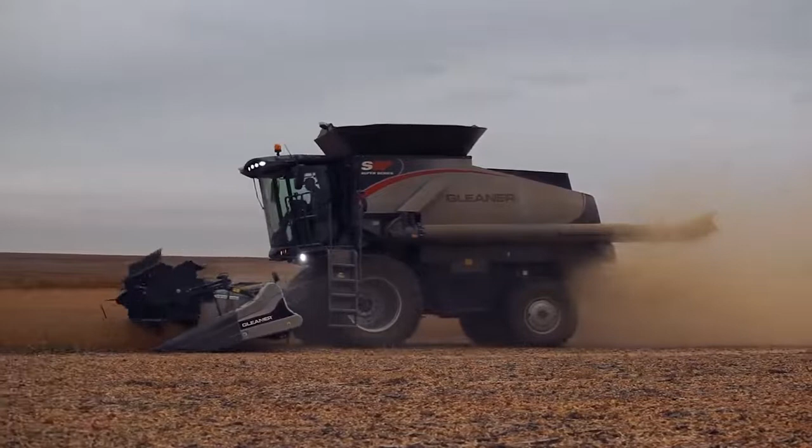Gleaner has a strong history of expertise in harvesting. Our lightweight, transverse design was born out of years of experience, and through that experience and specialization, we've developed a combine with our S9 series that can and will compete against any other competitive offering in the market and demonstrate exceptional efficiency, clean grain quality, and lower compaction.

This virtual event is a great way not only for you to learn about how Gleaner can add value to your operation, but also how to really optimize your machine throughout the year and throughout harvest to ensure you can get the most out of your machine. The team has a lot more in store for you here today, so I encourage you to enjoy our Live from Hesston virtual event. And if you haven't already, please visit our website at www.gleanercombines.com to learn more about all the latest offerings from Gleaner or to find your nearest Gleaner dealer. When it comes to harvesting, it's gotta be Gleaner.

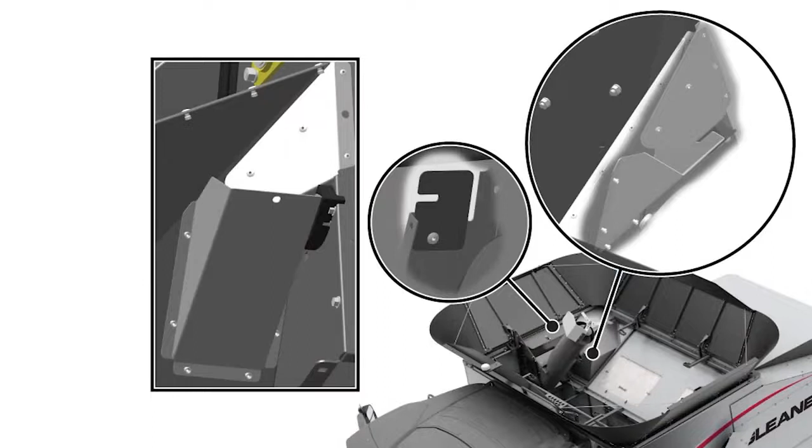The next item is the clean grain elevator. So we made improvements there as well. The chute and the funnel located on the clean grain elevator head cover have been updated to prevent grain leaks. The funnel has been lengthened and the chute has been fully enclosed. Additional sealing has been placed both at the funnel and at the clean grain elevator head door. This will impact those small grains such as canola, which can always find places to run out, even the smallest little cracks.

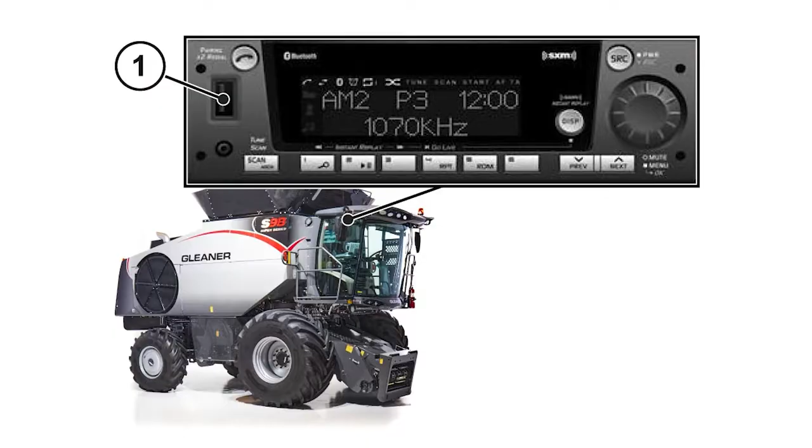Also, we've made some new improvements and added a new radio option. Both of these options have been updated to the latest display, which gives you the ability to charge iPads or whatever through the USB port and remove some of that old technology such as CD players. Both guidance receiver options have been updated also to the latest models. The Novatel receiver now is the Smart 7, and the Trimble guidance receiver is now the AG482. RTK is also available on your Gleaner combines as well right now.

So those are pretty much the model year 22 updates and improvements. There's more improvements being worked on currently with our engineering team right here in Hesston. So let's talk about kits. We have a few kits that will add performance to your Gleaner combine.

The slow speed elevator kit. This is to slow down the clean grain elevator when you're harvesting lower yielding crops. Speed obviously causes more wear on the chains and sprockets, along with less grain damage by being able to slow this down. Over the years, we've increased the performance of our elevators for these high yielding crops and we've sped things up, but it's not needed for all crops.

The next kit I would like to talk about is our chaffer extensions. These are additional hillside performance kits that you can put on to help keep that grain in its lane while you're harvesting on those slopes.

The Cascade Pan Blank kit is for those small grain applications. We added a perforated cascade pan for high yielding crops, which increased our shoe capacity. But for small grain, you may not need that, and this blank will actually help you clean up your bin sample in some conditions.

The perforated elevator boots have been around a long time. This helps remove dirt out of the grain while harvesting close to the ground - lentils, peas, beans, those types of crops.

And then we have a light seed kit. This is for when you're harvesting grass seeds, where low volume air is needed to keep that seed in the combine and not be blowing it out.

And then the last kit - don't forget that we have a hitch extension if you would like to pull your header trailers around behind your combine. Those are some of the kits available for your Gleaner combine. If you have questions on these kits, our product specialist can be a great resource for your needs.

So let's talk about some of the activities we've been doing lately.

We consistently hear from our customers about the low fuel usage, great grain quality, and low cost of ownership of their Gleaner combines. So our team decided we needed to start collecting some additional information from our customers to really understand the impact of all these items in a complete season. We asked several customers from different regions across the US to help us with this project, and we collected a lot of data. We also collected some from competitive machines as well, so we could compare.

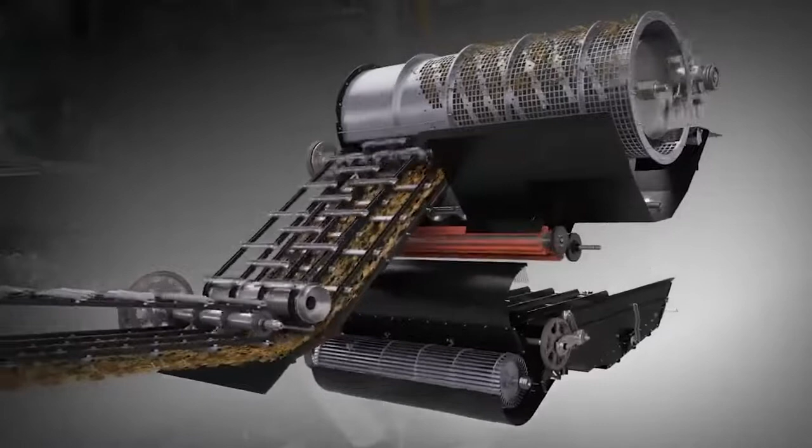Grain quality. The natural flow design keeps the crop flowing evenly without changing direction, controlling the flow of material from the time it enters the feeder house until it discharges out the back of the combine. 360 degrees of separation—the natural flow system is gentle on the crop, and the two-stage cleaning system will deliver a quality bin sample. But what does that mean?

No dockage at the elevator. And for some growers, it means being paid a premium for their crop without sacrificing capacity—all adding up, again, to increased margins for you, the grower.

And of course, fuel efficiency. All the items we've discussed thus far have a huge impact on the fuel efficiency of a Gleaner combine. Tied with AGCO Power engines, the machine will consistently harvest crops using less than a gallon per acre, all day, every day. And that equals less cost of operation.

As discussed, some things are out of our control, and some things we can control. There are just a few that we can control, and the Gleaner delivers a low cost of operation and low cost of ownership by design. No, this combine is not a 6,000-bushel-an-hour machine, but we know on the average farm it will harvest 3,500 to 4,000 bushels an hour for the entire season, not just for an hour, and do it with less cost than our competitors.

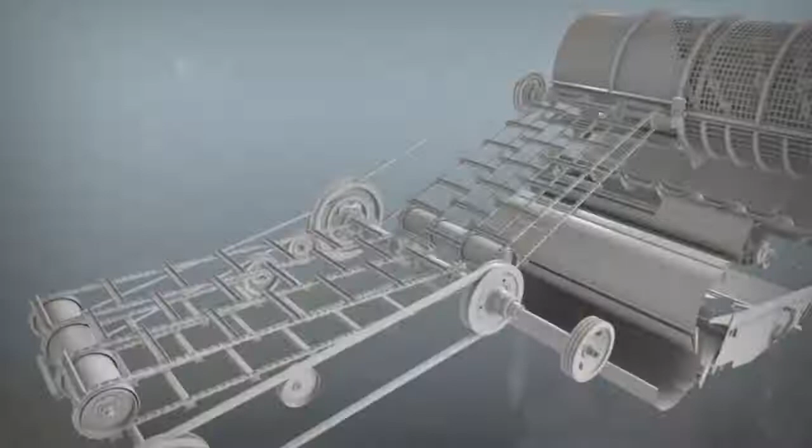The Gleaner combine uses two feeders, a front and rear feeder. The rear feed chain runs 10% faster than the front—this helps avoid any issues in the transition between the two feed chains. The feeder house was updated for S9 machines. First, the area below the feeder chain that introduces the crop into the processor was increased, which helps in heavy crop conditions and canola. In addition, the feeder house was lengthened to help with visibility of the header.

So let's talk, Aaron, a little bit about some of the things I hear at the farm shows all the time, and that's the width of this feeder house. At 39 inches, people are saying, how in the world can you get so much crop through there? Well, it's the design of the Gleaner that makes this possible. So we start at 39 inches at the front.

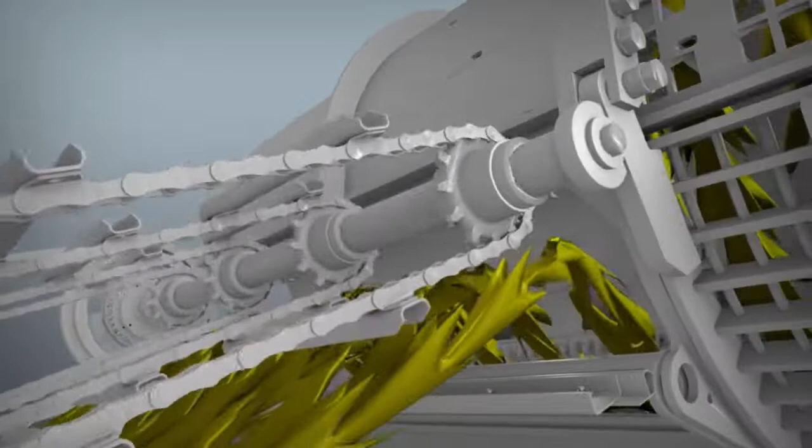That also happens to be the width of our concave, where it enters the processor. So once this crop enters the front of the combine, we're controlling that mat of material across the concaves through the natural flow process and out the back, always keeping the flow of material at an even pace and at the same width the whole distance.

Where the competition has wider feeder houses, at some point there's a transition point where we have to get it into the processor, and that gives you an opportunity for feeding issues, changing directions of the crop, maybe crop damage, a lot of different things. This is what really sets the natural flow system of the Gleaner combine apart, is how we handle the crop from the start to the finish.

The header drive is available in two different configurations: the standard fixed speed header drive or the optional variable speed header drive. A hose located at the single point connection is switched when you're installing a corn head.

Both header drive options include a 2-speed feeder drive that must be switched when switching between crops. You'll want to have it in high speed for small grains and low speed for corn.

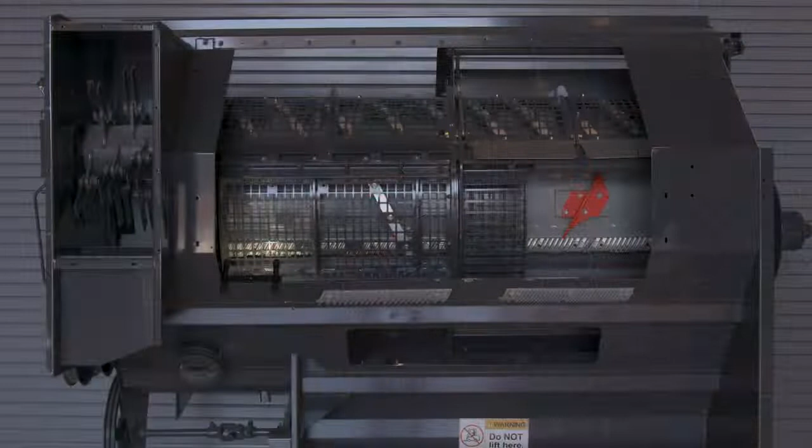Okay, thanks, Aaron. We've talked about the feeder house, now let's talk about the processor a little bit. I mentioned the 39-inch feeder house on the Gleaner. Now here's our concave area, which is also 39 inches. As the crop comes into the processor, we go across the concaves, then we start that 360 separation as the crop material moves through the processor. We have helical bars in here to help the flow of that material, keeping everything moving across the processor, and then out the discharge over here.

Now, a lot of people talk about the width of this discharge as well, like how do you get a 40-foot head and all that material coming out this discharge? Well, it's the way we feed the material out of the processor that makes the difference. Think about just taking a slice at a time off of that rotor as it's spinning the crop out of there, versus the competition, where you've got everything coming out of the back of that rotor. That's how we're able to get that much material through this discharge portion.

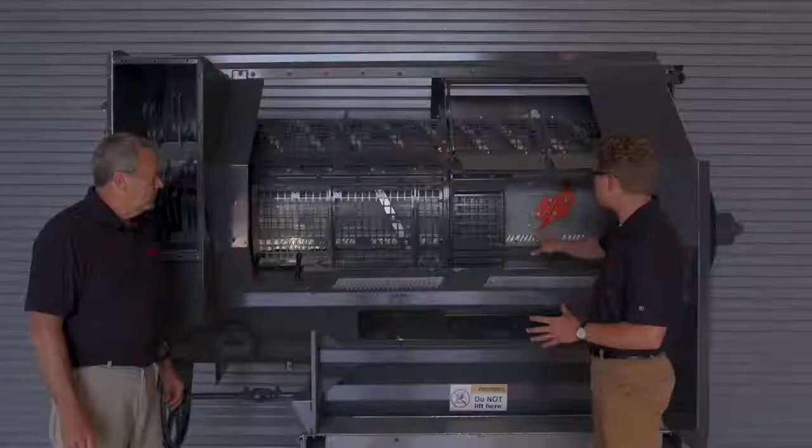Aaron, maybe step over here and walk us through a few more details of the processor, if you will. So the 30-inch rotor was introduced in 2011 with the S7 series of combines. We still use that same rotor in the S9s today. That rotor consists of 6 rows of threshing elements equally spaced around the rotor. Each one of those consists of long and short threshing elements.

The 3-bolt variety are in the threshing section, and the 4-bolt variety are in the separator section. The standard configuration is 3/4-inch spacing on all of the threshing element ribs. Those are equally spaced all the way around, and amongst those we have some with a reverse pattern to increase the amount of scrub as the material moves through the processor, which increases the threshing action.

So Aaron, tell me, I see we've got a narrow bar here. What's this bar actually used for? So this bar is our 1/2-inch spacing. This is for guys that have some tough threshing conditions, if you've got a lot of white caps or just conditions where you need a little bit of extra threshing.

The other person that's going to use that is the guy that has a stripper head installed. They're going to want to use these in addition to possibly some close-outs that install on the bottom side of the concave here. Now speaking of our concave, we can talk a little bit about it.

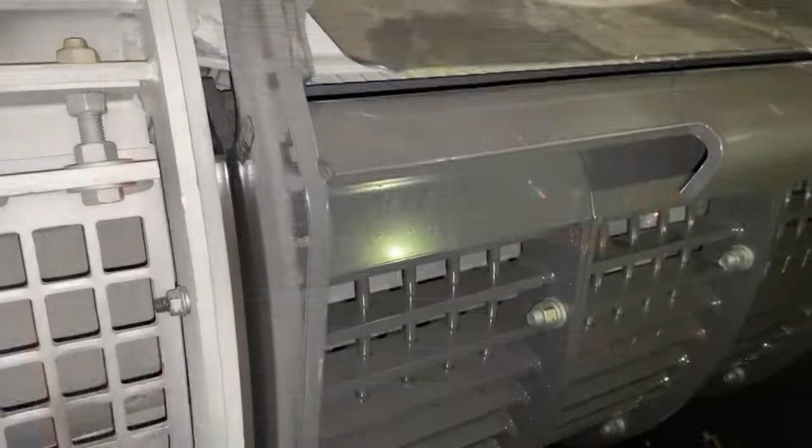Our concaves consist of 4 sections, kind of removable sections, in a pivoting frame here. The really positive thing about this is that we have one concave for all different crop varieties. You don't have to worry about switching between crops or different conditions, you don't have to worry about switching these concaves out.

So what you're telling me is that, like a lot of our competitors who are having to switch concaves, here we just go crop to crop. Absolutely, you can use the same concave for all different crop types. Just imagine the amount of time you're going to save by not having to switch these concaves out.

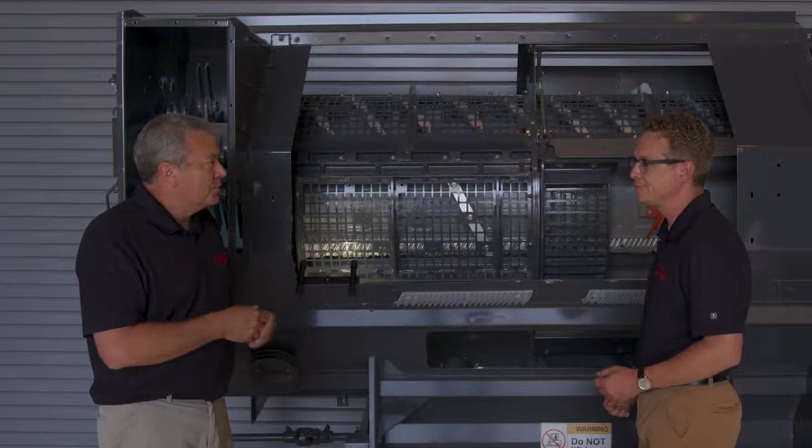Right. We talked earlier about the efficiency of the Gleaner combine and how we can get so much done. And this is just another time saving to make us more efficient. Absolutely.

Another thing we really want to talk about is making sure this is set up correctly. The important thing here is making sure these concaves are level. That's a really simple process - we've removed the center two concaves already for clarity, and it's a good standard procedure when leveling these concaves. When I'm talking about leveling, I'm making sure that on the left-hand side and the right-hand side we have the same amount of threshing across the whole concave section. Because if you're too tight on one side and too loose on the other, you could be over-threshing on one side and not threshing on the other.

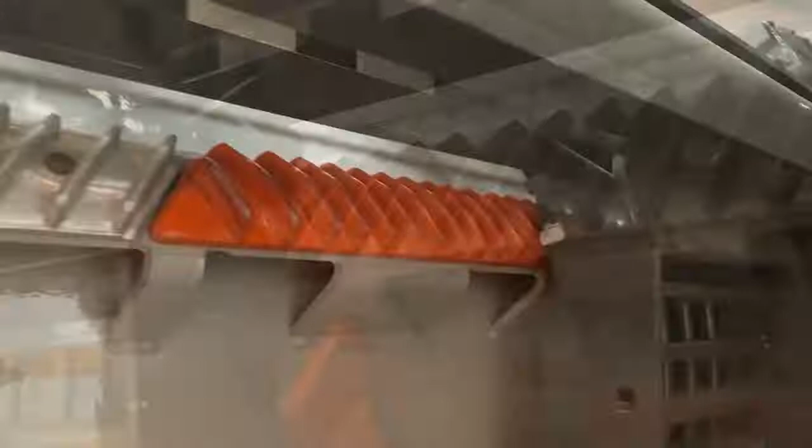So the way you do that is you want to make sure you have an eighth of an inch with this concave all the way closed. You want to have a minimum clearance of an eighth of an inch at the second concave crossbar here - we got them painted here just for clarity as well. That's another important thing we need to make sure of. All right, so a lot of stuff going on in the processor right now. So what else can you tell me about this? What else is going to happen here?

Another addition we've made to our rotor is the addition of these flights here. We talked earlier about our threshing elements, and the two things those are doing is threshing the crop and also conveying that material through the processor. When we increased the size of the threshing element, we saw there was a chance that when we're feeding that crop mat in, it's going to lay over on top of itself.

So to help alleviate that - that's creating two conditions - these flights we've installed on the rotor help answer that. The two reasons: when it feeds on top of itself, it increases the thickness of that crop mat, which creates an issue where we need more horsepower to drive that through. The other issue is that it traps seeds in that crop mat that could cause increased rotor loss. So what these flights do is move that crop mat over just slightly to help keep that crop mat from laying over on top of itself.

Which is so important in the overall feeding of any combine - keeping that material moving evenly so that you can thresh it and clean it. The whole system just works so much better.

The other item here, as you talked about the sweeps, the cylinder bars are an important part of that conveyance as well. So it's always important to keep your cylinder bars in really good shape, because that can hinder the performance, not only threshing, but keeping the material moving through the combine.

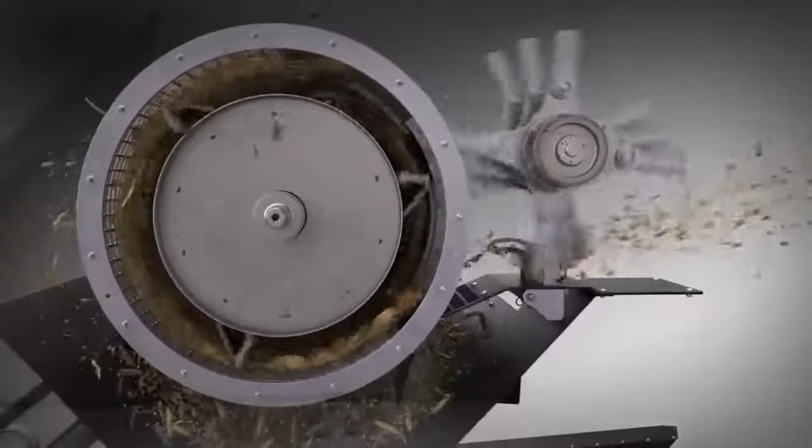Because if we didn't have that vertical helical vane there, that allows kind of a shortcut for that crop to exit the processor. That's going to do two things: it's going to wear out the side of the separator cage, and it's also going to wear out the inside knives on our chopper. So we put that vertical helical in to kick that material around one more time and feed that chopper correctly. Guys with earlier machines can install that vertical helical and see that same benefit as well.

All right, this is an impressive system, Aaron. Oh, it's great, it's great. Efficient and simple, and just a great overall process. So what else does this processor do after we've done all that in the rotor? What's next? Let's take a look.

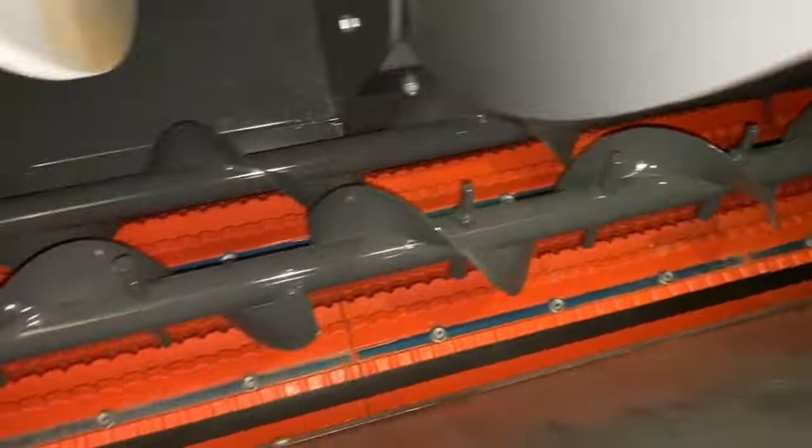It's right here, right below us on our separator cage. Okay, so tell me what's going on there. So I see augers and... We've got two distribution augers with opposed flighting that bring the material over from the separator section and from the threshing section as well.

And that drops that material down to our accelerator rolls. Our accelerator rolls push that crop material, or material falling off of our processor, through that first stream of air. Now, one thing you'll notice is that on some of these lugs, there's orange paint. There's also the soft or black lug that's still available, but those with earlier machines who want to increase the life of their accelerator roll lugs can install these orange lugs, which have a harder durometer rubber to increase the life of those accelerator rolls.

So with all this going on, and we talk about our two-stage cleaning in the Gleaner combine, I talked about it earlier, this is how we're able to achieve that: by pushing that crop down, getting that blast of air as it comes off of the accelerator rolls, and also giving us some really good hillside performance as well.

Absolutely. The guys that really work the machine, like in Idaho where they're harvesting on the sides of hills, we don't rely on gravity to propel that grain through to the shoe. That's why guys on the sides of hills in Idaho, or anywhere with any kind of incline, don't have the need or want for an expensive or complicated leveling system, because we use our accelerator rolls to evenly load that shoe.

So when you look at the overall design of this processor, the cleaning system, the transverse design, which is one of a kind, it's set up to not only be a great processor but also a cleaning system all in one, just like if you were cleaning your seeds through a regular cleaning process. That's what this machine is doing while it's working through the field.

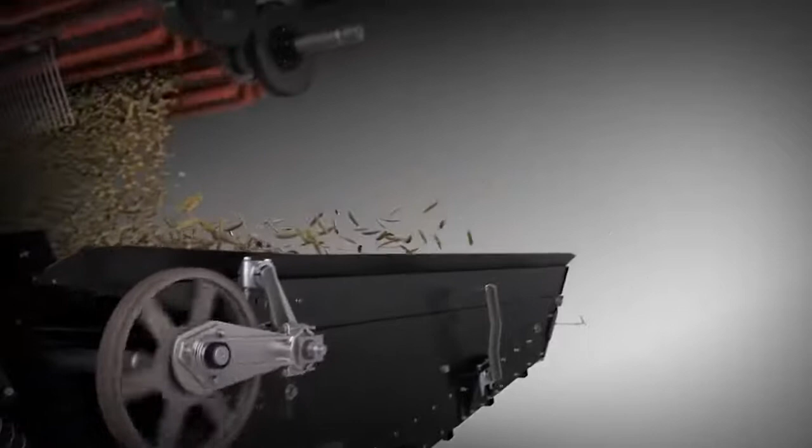The first stream is where a majority of that cleaning action happens. The accelerator rolls throw that material through that first stream of air, and the more dense crop is able to pass through that first stream, while the less dense mog is blown out the back of the machine.

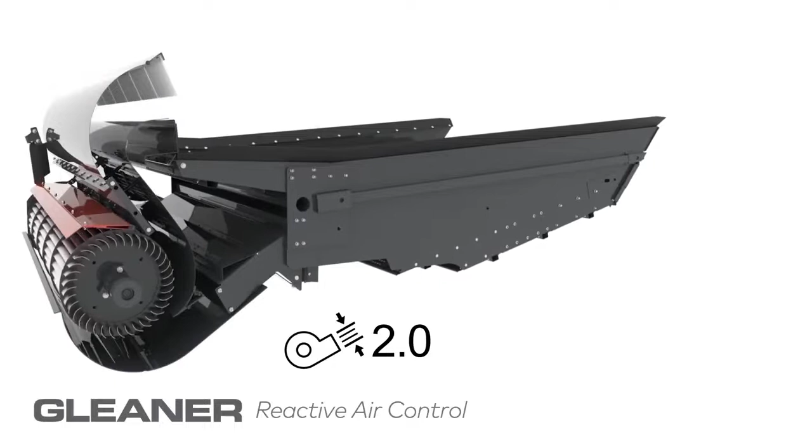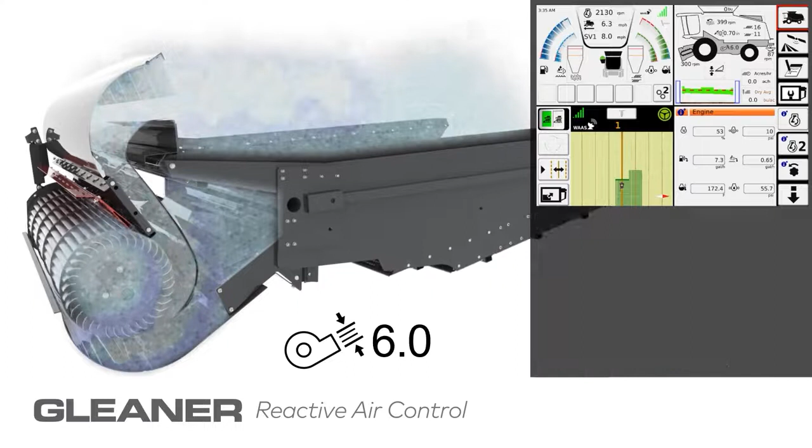So what changes have we made to this system recently? Because I feel like we've got something extra in there. We introduced the reactive air control system, where we control the amount of air coming out of the fan by adjusting the choke based on the position of the feeder house. As the feeder house comes up above the cutoff line, we decrease the volume to decrease the airflow, saving seed coming across the shoe and decreasing shoe loss.

This happens at each end of the headlands, saving that seed to keep it in the bin and not on the ground. Okay, so that's just another feature we offer on the Gleaner Combine that helps the bottom line by keeping all the grain in the tank.

So when you look at the whole system here, we've been through the processor, we've talked about the distribution augers, the accelerator rolls, the two-stage cleaning here that I alluded to earlier to get those clean bin samples. These are the types of things that really set this machine apart, and that is the heart of the Gleaner Combine: the transverse rotor, distribution augers, accelerator rolls, and two-stage cleaning, all part of that extra you get with the Gleaner Combine.

We've got a few other things to talk about. We've got the cleaning shoe too. So let's take a look at the back side of the machine and talk a little bit about it as well. All right, very good.

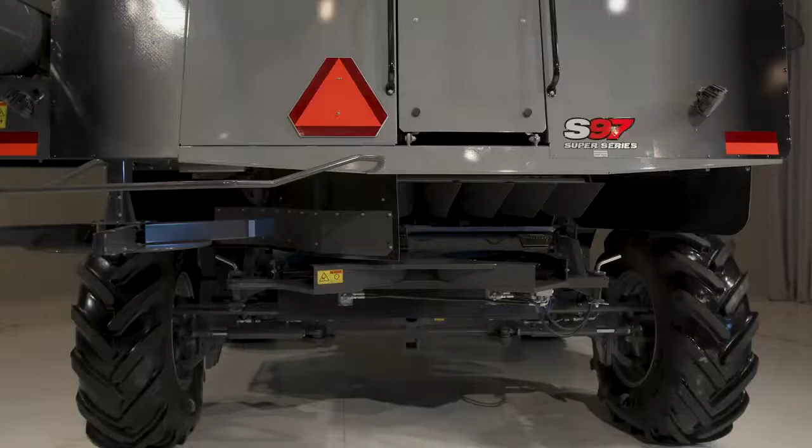So Aaron, I hear so much out there in the field about residue management and how important that is. And we've talked about a lot of other important things this machine does. Tell me about the residue management system on the Gleaner.

Well, there's a couple things we can talk about. First off, at the end of the rotor, we alluded to it a little bit earlier about our chopper, but we actually have two different options. We have an impeller, which is standard on machines, and the optional 24-blade chopper, which is a two-speed chopper you're able to adjust between different crops. You want it in high speed for small grain and low speed for corn.

So once that material comes off of that rotor, off of the chopper or the impeller, it comes down here to our straw spreader. Now, a straw spreader on the S9 machines utilizes a closed loop functionality to where we're maintaining that spreader speed throughout the day, whether the oil's hot or cold.

Also, Aaron, I see there's some adjustments on these spreader blades. Exactly. So what we adjust that for is to be able to adjust our spreader width. If we've got different sizes of headers, or if you need to direct it in one direction or the other, you can adjust the position of those slingers to be able to adjust that spreader width.

So when you look at the residue management coming out of the Gleaner, you have everything off your discharge, which is being spread with the spreader over here, and then all of your chaff and other material coming off of our shoe comes right into our standard chaff spreader. All machines are equipped with a hydraulically driven chaff spreader.

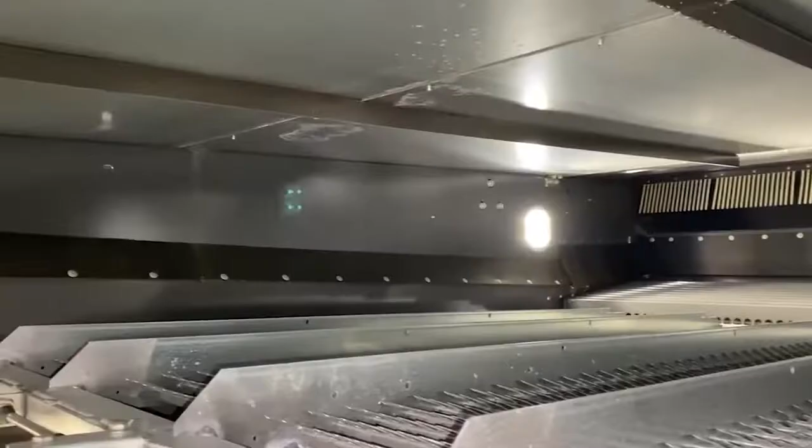Absolutely. So on our chaffer and sieve, again, when that material comes through that first stream of air, it's deposited onto the cascade pan, which we have perforated to increase the amount of cleaning surface area that we have on the shoe.

Now, I think you alluded to it a little earlier. We have a kit available to be able to block that off in certain small grain conditions. Yes, absolutely, and in some conditions that's maybe a kit that you would need. So as far as the chaffer and sieve, we have different options depending on crop condition or just the cleanliness, how they want to adjust that cleaning shoe to get the maximum cleanliness out of their bin sample.

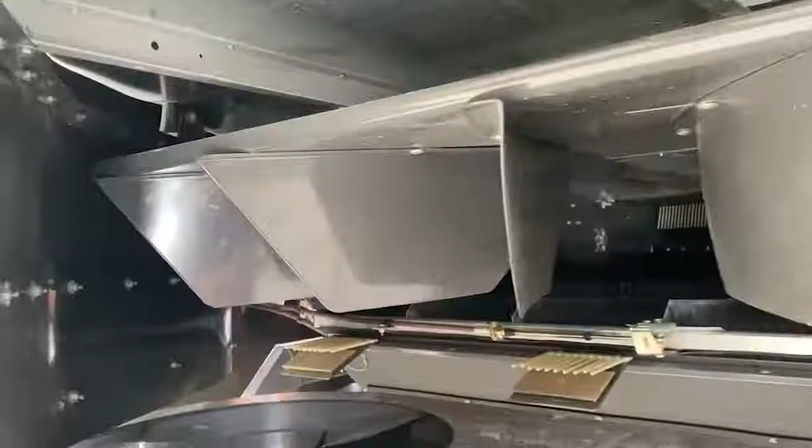So just noticing these fins in there, Aaron. That's our spreader board that's distributing the material we were talking about earlier, that's coming through that first stream of air. It distributes that material across the width of the back of the machine to maximize discharge spread, to get that nice even flow or mat for those guys looking for no-till or just decomposition of that material.

So there's a lot of air coming out of there. A ton of air coming out. Again, the majority of our cleaning is happening through that first stream of air, and that's all part of the cleaning system on the Gleaner combine. Absolutely. So let's talk a little bit more about our unloading auger system and our grain tank.

So Aaron, we've talked about feeding, the processor, the cleaning system, residue management on this Gleaner combine, but what about the grain handling system? Well, we've got one of the best in the industry. It's one of the fastest and most efficient, as well as one of the best as far as keeping that clean grain bin sample.

So with a 4 bushel per second unloading auger rate, we're able to go from full to empty in about 90 seconds. To do that, we incorporate this swivel design here that, unlike our competitive machines, doesn't use a lot of power to go through that turret unloading auger that they have. We're able to easily transition that material out to the grain cart.

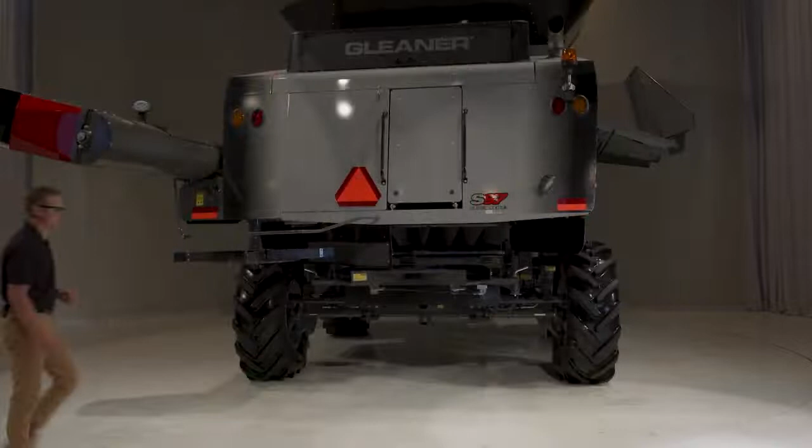Daily inspections start in the engine compartment. Make a general inspection for any material buildup or leaks around the engine. You also want to inspect around the heat shields to make sure there isn't any material buildup around the heat shields of the engine.

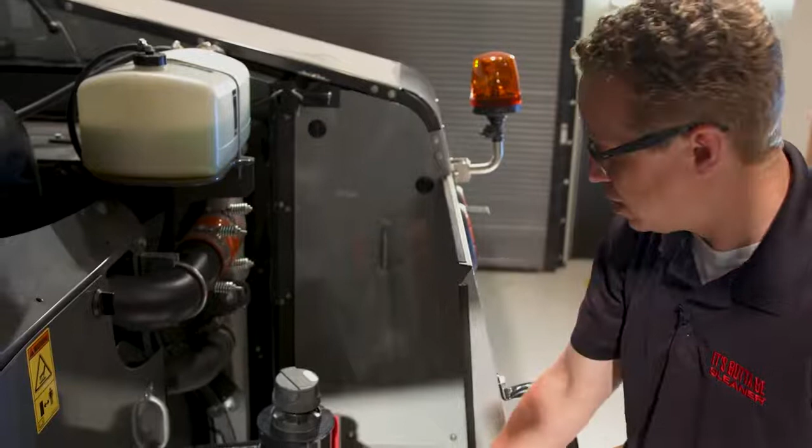The hydraulic reservoir for the hydraulic system is located in the engine compartment. It's important to check the level with the feeder house down and the unloading auger swung in. If you check it with the feeder house up or the unloading auger swung out, you're going to see that this reads low. And if you overfill it and then drop the feeder house or swing the auger in, you're going to have quite the mess in the engine compartment.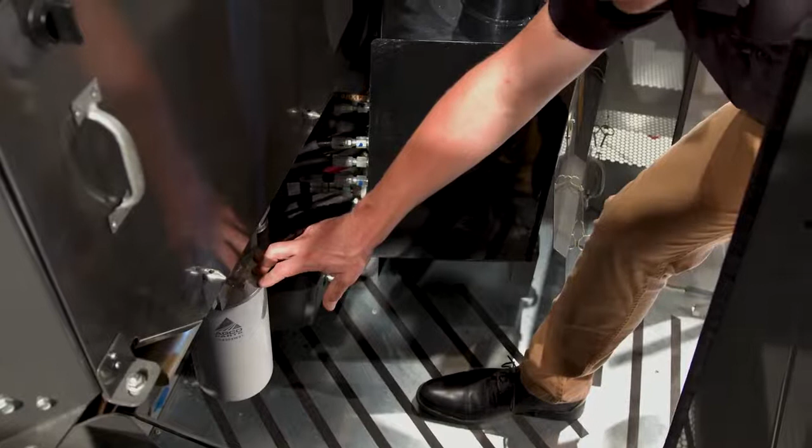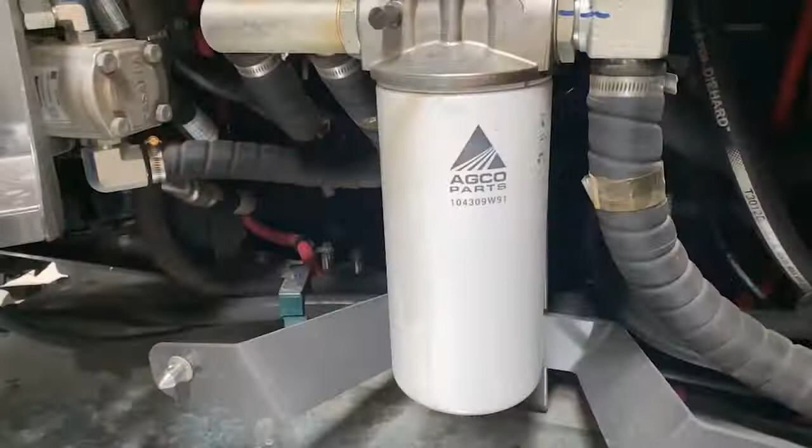Also located inside the engine compartment is the hydraulic charge filter. This needs to be changed every 250 hours. Any time you change the hydraulic charge filter, you need to make sure you bleed the air from the system. There's a little bleeder valve right here, so when you change this, fill the reservoir until you get just hydraulic oil out of the bleeder screw. If you have a pocket of trapped air and start the combine, there's a really good chance you'll cavitate the charge pump and destroy it. So make sure that anytime you change this charge filter, you're bleeding the air from the system.

You'll also want to change the charge filter, the hydraulic oil, and our return filter every 500 hours.

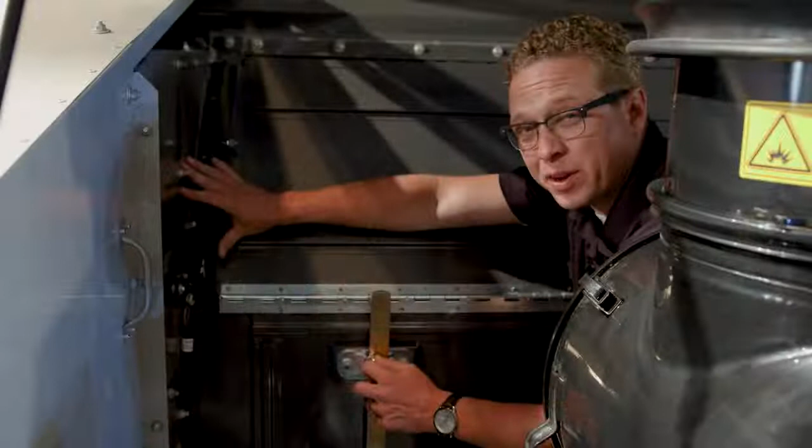While you're in the engine compartment, it's a good idea to open up the processor door and inspect our rotor and separator cage for any kind of material buildup or condition of our rotor components.

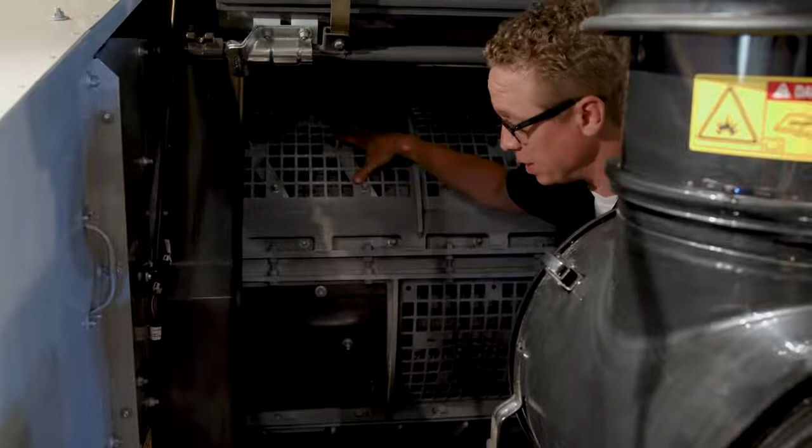You want to inspect for any kind of material buildup between the separator cage and the separator door. You'll notice there's a panel installed here that helps prevent that from occurring. Sometimes rotor speed can cause that accumulation to build up as well, so before you remove this panel, try adjusting your rotor speed, dropping it a little bit, to see if that corrects the accumulation. You can also see inside here we can access our chopper knives, so if you need to move these stationary chopper knives depending on the crop you've got, you can do that from inside here.

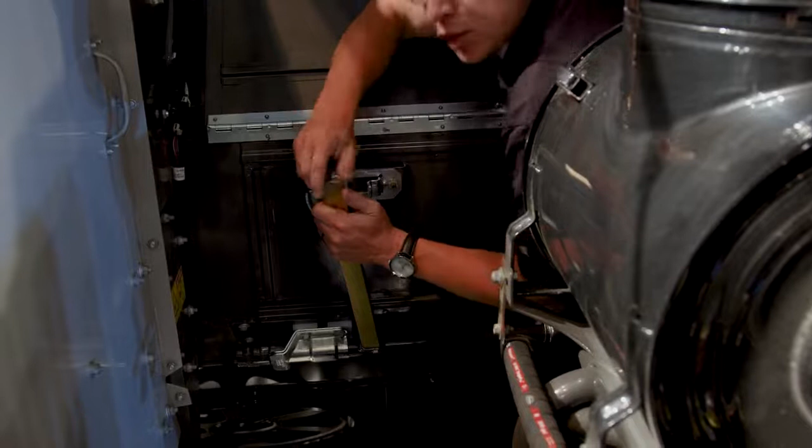Make sure that when you're closing this processor door, these latches are securely latched. If they're not securely latched and this door is not fully closed, you can fill the engine compartment with material really quick. So make sure you put a hand on these and check that they're fully latched.

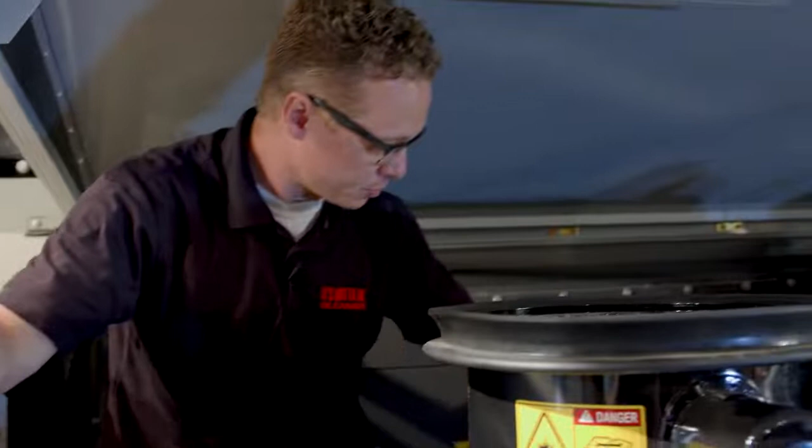The front of our engine is easily accessible from the front and rear side of the engine, unlike our competition, which requires taking panels off and going through the grain tank to access the engine. Our engine oil dipstick is located on the front side of the engine, as well as our fuel filters. There's also an additional fuel filter located underneath this step here.

You'll also want to check for any accumulation of dirt or debris on top of our pre-cleaner. Open the air cleaner up and check the primary and secondary filter, cleaning the primary filter or replacing the secondary filter as needed.

One point to make on hydraulic oil filters is that we only have two hydraulic oil filters on the whole hydraulic system.

On competitive machines, depending on the configuration, you can have as many as 4 oil filters to change periodically. We're going to continue our inspection on the left-hand side of the machine at the operator cab platform ladder.

The unloading auger swivel contains a majority of the grease fittings on the left-hand side of the machine. It's important to swivel that unloading auger incrementally as you're greasing those fittings to make sure you've got good coverage of grease throughout the swing. It's also important to remember to grease the fitting at the end of the unloading auger for the bearing, the unloading auger U-joints, and the cross auger bearing support as well.

Cleanouts are included on the swivel here on the outside and on the inside to be able to remove any debris from the bottom of the grain tank. Before you go harvest, it's very important to make sure both of those are installed.

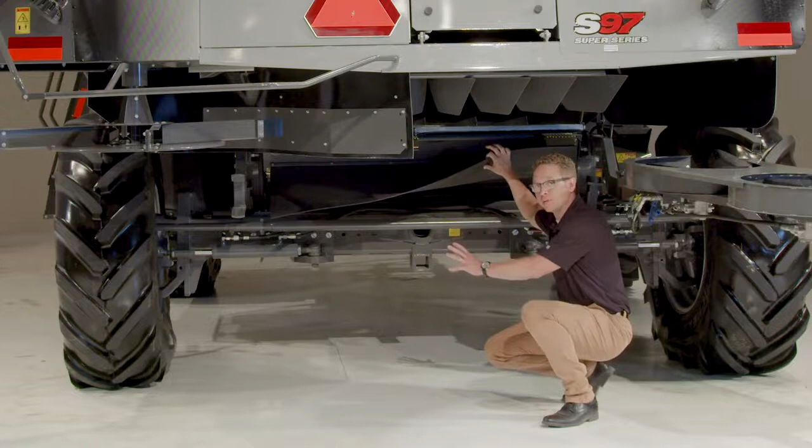In addition to that, each axle has connecting rod ball joints and steering cylinder ball joints that need to be lubricated every other week. While you're lubricating these fittings, it's a good idea to remove any debris that might affect the hoses for the hydraulic cylinders or any of the electrical harnesses that run along the rear axle as well.

Let's continue our walk around on the right-hand side of the machine.

The rotary screen and cooling package are easily accessed and cleaned from the ground. The cooling package includes the radiator, the combo cooler, and the fuel cooler.

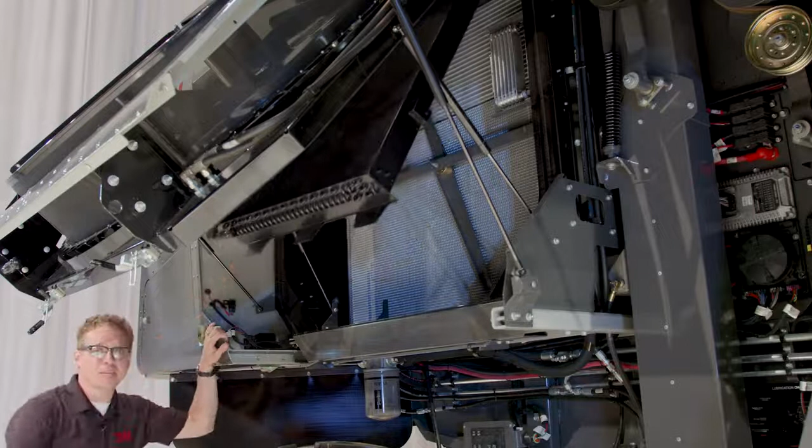While the SmartCool fan does a great job of keeping the cooling package clean, it's a good idea to come in here every day and inspect the area for any material or anything that's trapped inside the rotary screen basket. If you're seeing excessive material build up in here, check the speed on the rotary screen. If it's too slow, the air seal, the little fins located on the outside of the basket, can't develop the air seal needed to keep that material out. The specified speed is 180 RPM.

Another location or service point that's often missed is the idler arm for our rotary screen drive belt. We need to come in here and lubricate and check that every couple of weeks.

The clean grain and return elevators are tensioned from the ground. Make sure that you can move the link laterally, but you can't pull the link away from the bottom of the sprocket.

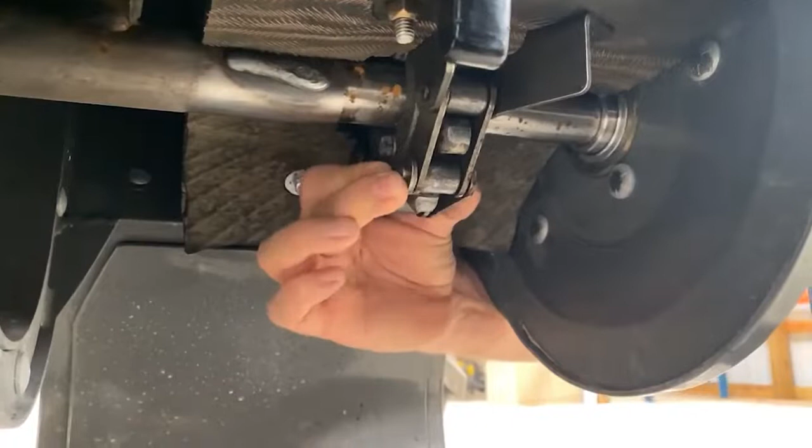Each elevator also includes a torque limiter. This is one of those few places where you might have to get off the ground to service those torque limiters, but again, you can use the step located here on the right-hand side.

One area that operators try to cut costs is by using aftermarket parts, and the elevator chains are a good example of why you don't want to do that. AGCO genuine parts include updates to improve performance and durability that a lot of aftermarket parts don't include.

A dealer I once visited recently had a great example of this. An operator tried to save money by purchasing aftermarket elevator chains. Those chains didn't include the updates to the hardware that secure the paddles to the chain. Predictably, those paddles came off, and now the operator was out the cost of that aftermarket part and the AGCO genuine part they should have purchased in the first place.

Secondly, aftermarket parts are typically cheaper because they shortcut on materials. The materials we use in AGCO genuine parts are specified by engineering for the best results in performance. Saving money on these aftermarket parts sounds like a great idea at the time, but does that idea sound as good when the machine is down, when time is valuable, and you've lost that time due to a lesser quality part?

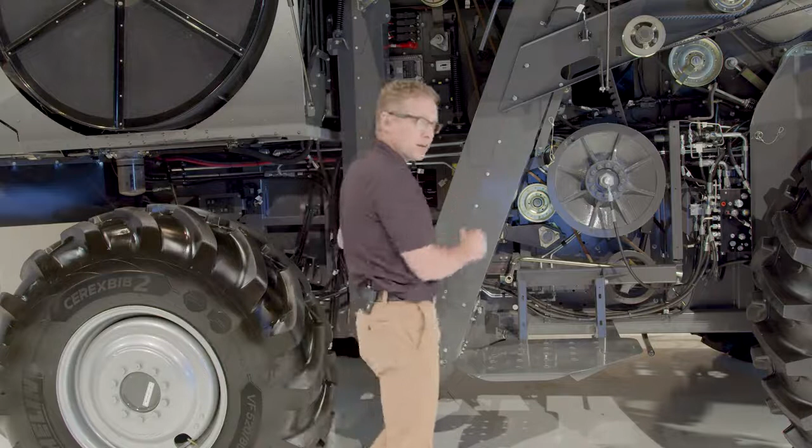So moving on, our rotor drive is located on the right-hand side, and it uses two variable sheaves to adjust the speed.

The driven sheave is lubricated, and there's a daily lubrication on that. When you lubricate it, it's important that we adjust the rotor speed to evenly distribute that grease along a torque cam located inside of that driven sheave. If we don't evenly distribute that grease, there's a good chance we could bind that torque cam and cause some rotor drive belt slipping.

That variable sheave is also attached to our DuraGuard rotor gearbox. We need to check the oil level in it using the elbow located to the rear of the gearbox. The oil level must be at the top, even with the top of that horizontal portion of that elbow. There's also a grease fitting that needs to be done daily for the coupler that goes between the gearbox and the rotor.

We'll continue our inspection, or our walk around, at the front of the machine at the feeder house.

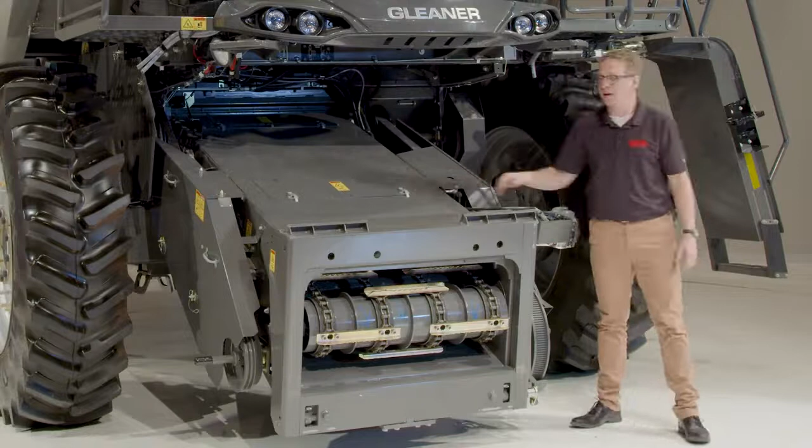Remove the access panels from the feeder house to inspect the condition of the front feeder chain. Make sure the slats are securely attached and aren't cracked or bent. You'll also want to check the tension of the feeder chain as well.

Tension springs located on the left-hand and right-hand side of the feeder tension that feeder chain. Make sure the springs are compressed to the equal length of this spring gauge. There's also tension springs for the rear feeder. You want to inspect the condition of the rear feeder and make sure those tension springs are adjusted as well.

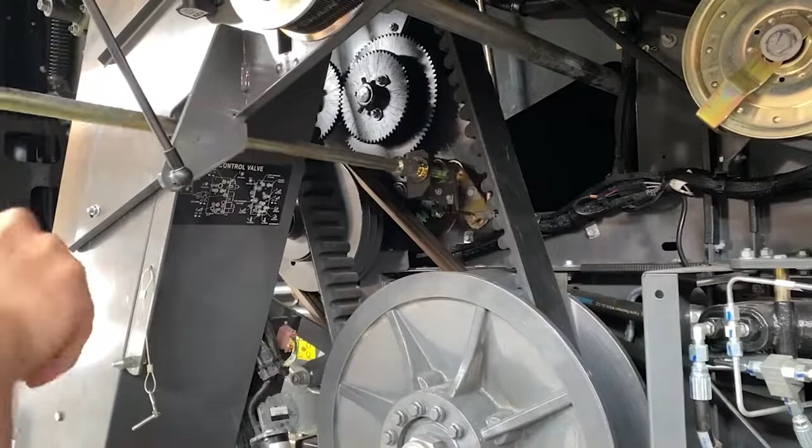Make sure that you've also emptied out the rock trap daily. You'll want to do that on the right-hand side using the lever. Make sure you close it before you harvest as well.

As far as lubrication fittings, there's only two daily lubrication fittings, and those are for the pivot blocks of the feeder house, located on the left-hand and right-hand side of the machine. The torque limiter for the feeder and the lateral tilt are lubricated weekly, and the couplers for the axle drive line are lubricated once a month.

While you're at the front of the machine, you'll also want to check the condition of the drain tubes for the air conditioner. Make sure there's no dirt or material buildup at the end of them, and make sure the valves are still installed.

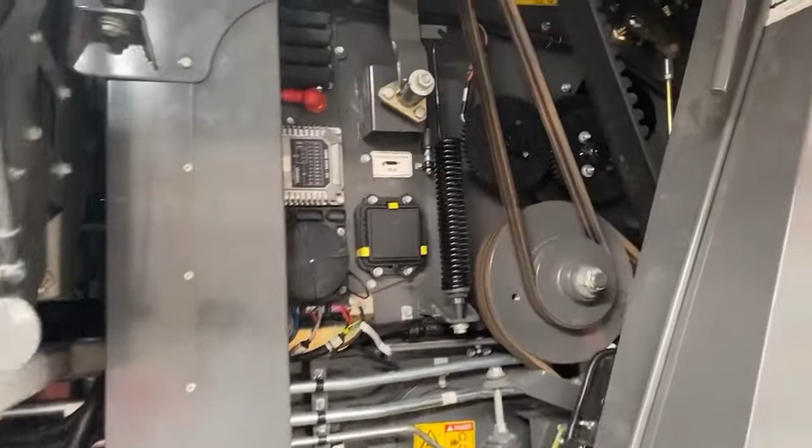One of the many benefits of owning and operating a Gleaner combine is the lower cost and ease of maintenance and repair. If you've ever opened the side shield to a Gleaner and compared it to the competition, the most striking observation is the accessibility to major components of the Gleaner. This helps with maintaining the machine and gets you in the field faster should an unexpected failure occur.

Unexpected repairs are going to happen with any machine. It's how fast you can get back into the field that matters most. Having a machine that is easier to maintain means less time invested during the day with a wrench and a grease gun, and more time in the field enjoying the harvest experience.

This has been a quick walk around of the machine. If you'd like more information, reference the operator manual or visit with your local Gleaner dealer. I'll turn it back over to you, Kevin.

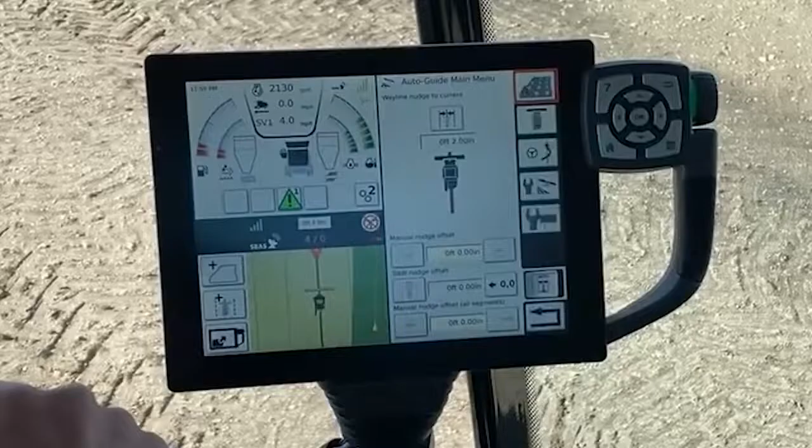Thanks, Kevin. I'm going to take a few moments to tell you about the powerful technology offerings on the Gleaner S9. At the heart of the precision offering is the Titan terminal. This 10.4-inch terminal displays crucial information relating to your combine's performance, such as machine settings, status, yield and moisture, and much more. The Titan terminal also allows the user to perform important calibrations such as header, guidance, and yield calibrations.

In addition, the Titan terminal handles all of your guidance and task handling needs. Jared will take you through some of the key terminal functions in a moment, but first let's continue looking at additional technology features of the Gleaner Combine.

The Gleaner S9 offers the option between two well-known and highly accurate GPS receivers. The Novatel Smart 7 and Trimble 382 are both excellent options that offer accuracy levels ranging from WAAS all the way to centimeter level RTK. You cannot go wrong with either of these choices, which provide location information for guidance corrections, as well as location for your yield maps, helping you identify high or low performing areas in a given field.

Up next is the guidance controller, or VDO4. This device acts as the brains behind the guidance operation, taking positioning data and directing the machine how to steer when engaged in auto guidance. The internal modem can be fit with a data plan to provide network RTK corrections and is also used in the TaskDoc Pro wireless data transfer feature.

TaskDoc Pro is AGCO's own wireless data transfer solution. Coupled with AgCommand and an active cellular data plan, the Gleaner S9 is capable of wirelessly transferring task data such as yield and moisture, boundaries, and guidance lines to your favorite farm management information system, or FMIS. Workflows can be created to automatically send this data to your FMIS once a task is booked.

Here on my right-hand side is actually a bank of switches for all your main and key functions for your Gleaner Combine. So anything that you need to do for in-field operation, to transitioning from a field to a transport mode, can all be controlled from right here from your right hand, very easily and accessible.

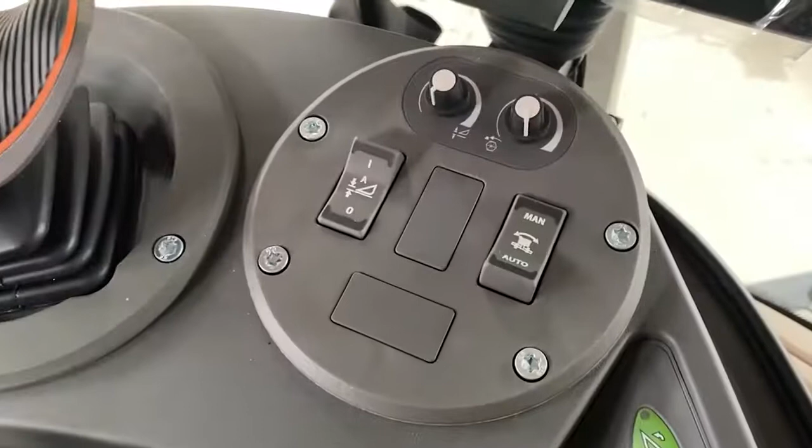Up here in the center is your controls for your auto header height and auto tilt control. There's two buttons, or two toggle switches, for turning your auto header height on or your auto tilt on, along with two rotary dials for controlling reel speed and height.

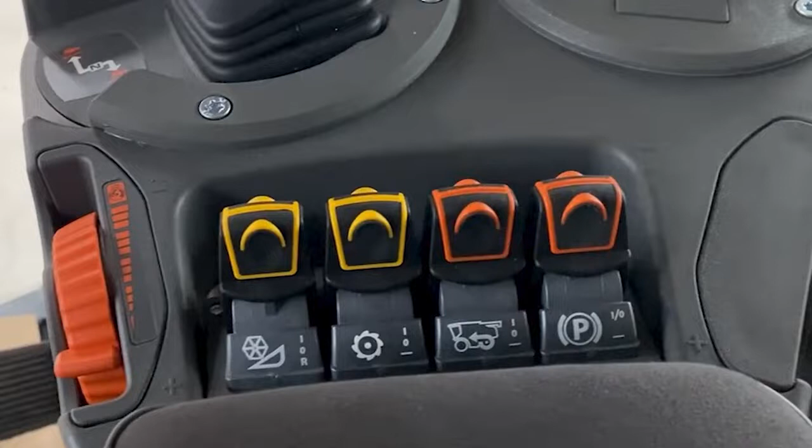Additionally, we have a bank of switches here. These 4 switches control a variety of functions, 2 of the functions being primarily your thresher engagement and header engagement. We have a park brake switch, and then we also have an RWA switch here that's an option on your Gleaner Combine. Jumping over to the Titan terminal, I'd like to remind everyone some of the key setup things as you guys get ready for harvest this fall.

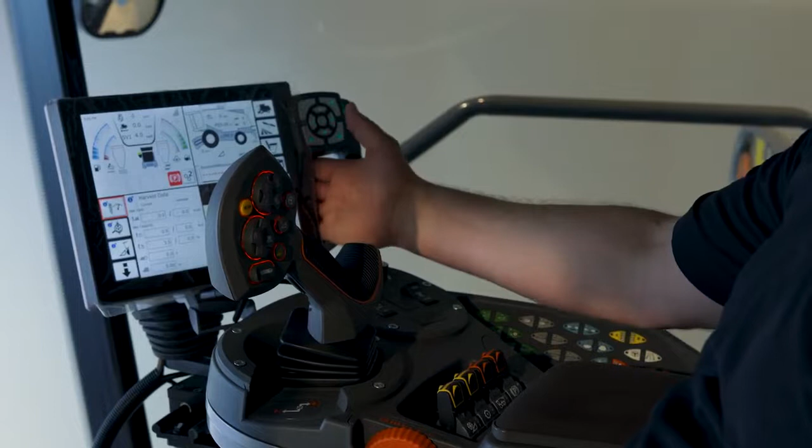First and foremost, we're going to show you and walk you through how to import fields. So if you're like me and you're a big planner, you might want to try to set up some fields and boundaries before you start your harvest.

Starting out, we're going to go into the admin menu. You'll find this menu by the icon here on the right, 4th button from the top. It's the one that looks kind of like your Titan terminal with a wrench in the middle. We'll press that button twice.

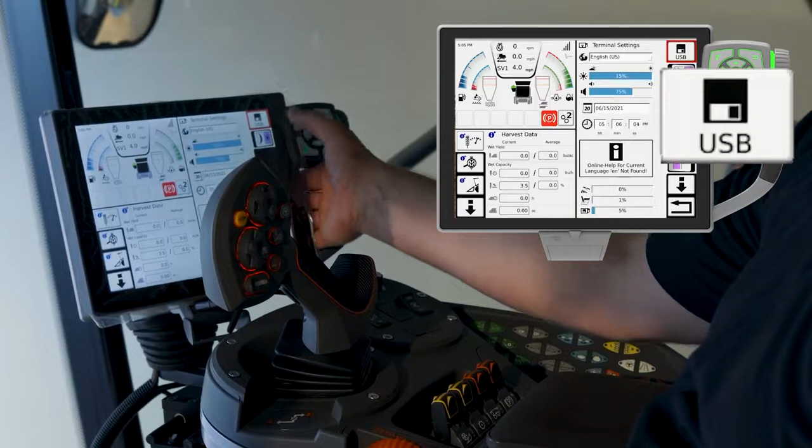Then we'll navigate to the very top button that says USB. Here you'll find your data exchange server. This allows you to import or export data or tasks depending on the time of harvest that you're in. Since we're preparing for harvest, we want to import our Tritera field. You simply select that field, hit the up arrow, and it will copy that onto your terminal.

We'll use this field a little bit later when we're setting up our task data. To recenter, we're going to go ahead and hit the home button. That'll bring us back to our default view of the Titan terminal.

The next task that we like to do is start a task. To start a task, you'll see the third button on the right is a notepad. We'll select that button and we'll press it twice again.

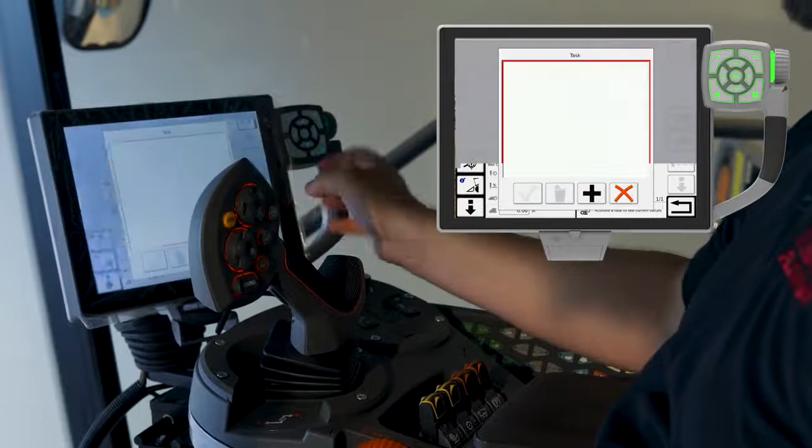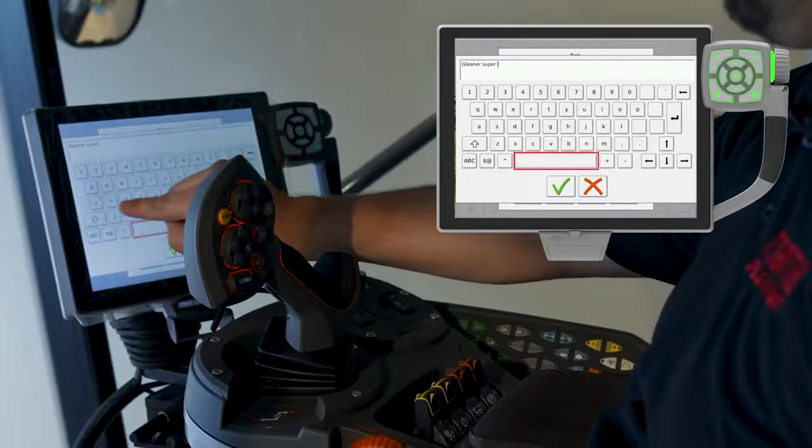To create a task, we're going to select where it says no task selected. We're going to hit the plus icon and we're going to type in Gleaner Super Series. Upon hitting the green check mark, it's automatically going to add another header for us.

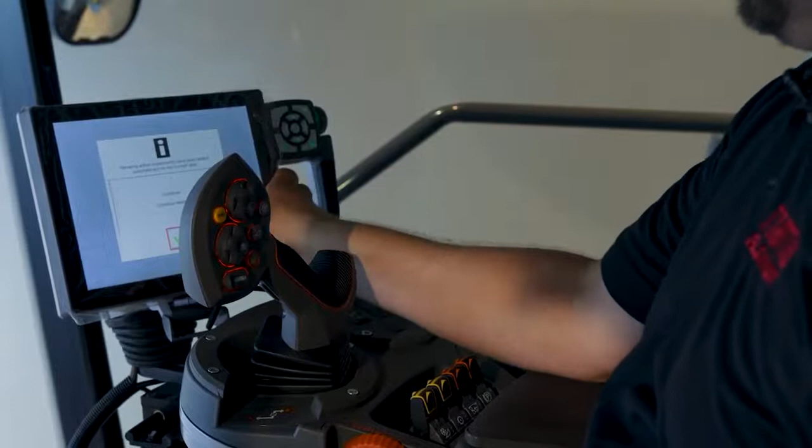This is important for some of the ag control data that we're going to have as it relates to trying to create the most accurate yield data possible. We'll touch on that a little bit later. We'll hit the green check mark, and as you'll see, you'll already have two different types of tasks added to your Gleaner Super Series task.

Next, we want to add your field. We'll go here, and we'll see one of the categories is field. We'll select that, and there's our field, Tritera, that we created and imported earlier. It'll pop up an info box that'll ask you, do you want to use this field Tritera for your guidance system? Yes, we do.

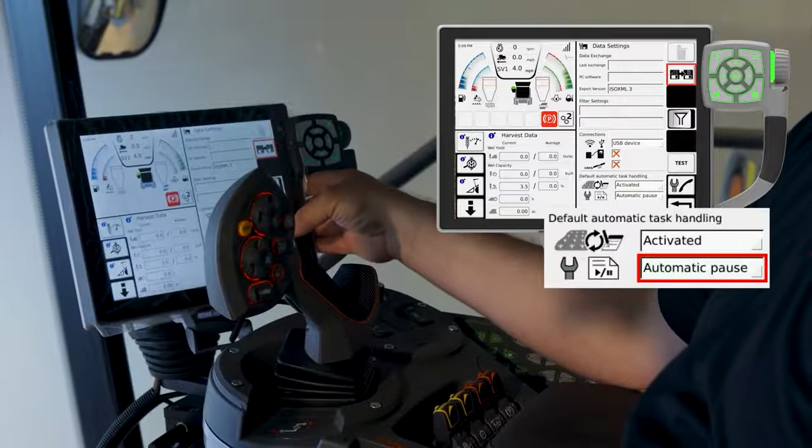Now we have our initial task set up. Next, let's navigate into our data settings page to ensure that we have the correct triggers for automatically starting and stopping tasks. By default, here on the bottom of this page, you're going to see default automatic task handling.

These should automatically be set to activated and automatically, along with automatic pause and start task. This is important so that when you enter or leave a field, your task data will automatically start and stop so you can keep your fields clear and your data as accurate as possible.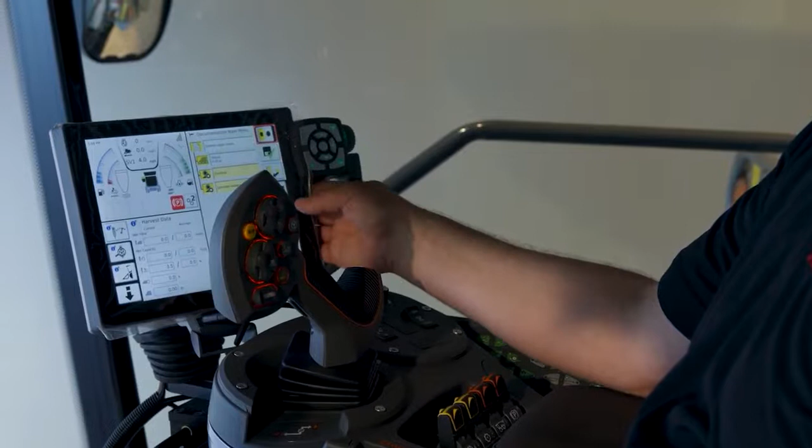One other thing to check while we're in this menu is your counters. Your Gleaner Super Series has a number of different counters on board. These counters help reflect what is shown in your harvest data page down here in the bottom left. It's really important to make sure that when you start your harvest, if you want to see data down there, that you have the right counter or the right field selected.

Right now by default we have the task controller on, and that info plus is active. That's indicated by this blue toggle switch here towards the bottom right.

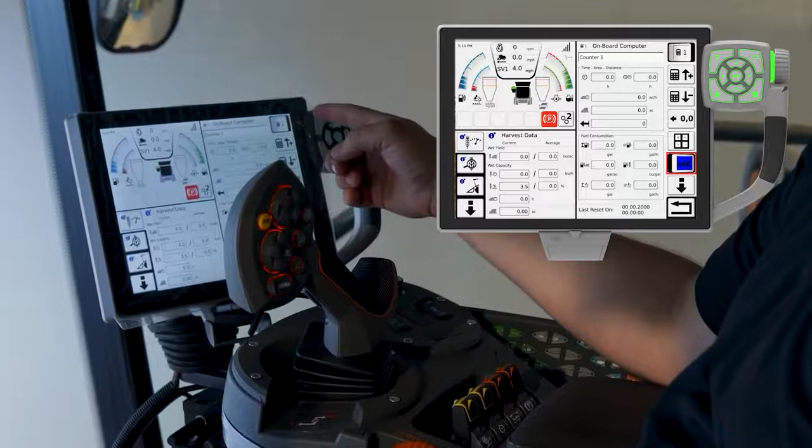If that is off, or you have another counter on, for example, let's turn the counter 1 info plus on. That means that this counter 1 is now shown in your bottom left. If your top counter switch is off, we're going to go ahead and turn that on, so you're now using both your counter 1 and your task data to record.

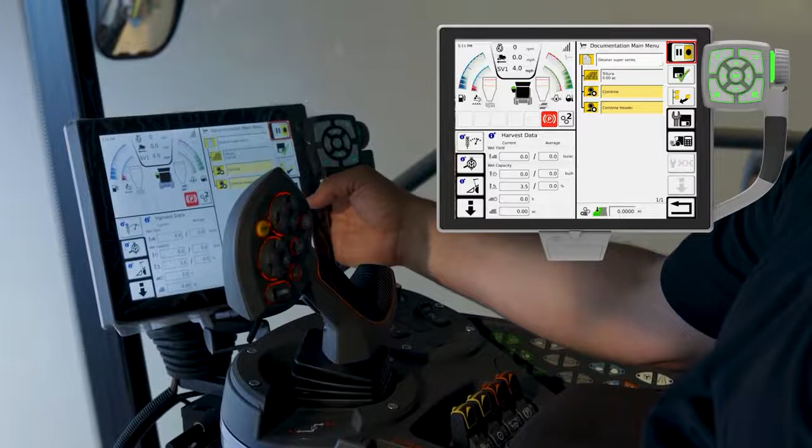One important thing to remember is your counter data does not store your task data. Your task controller data and your counter data is separate. So to really record your task controller data, you do this by the top switch up here on the top right. You toggle that on, and you'll see now here on this quadrant that there is another notepad that turned green.

If that's green, that means you're actively recording data. If you toggle it off, you'll see that it grays out and it's more of a white icon. That means that your task is not active.

That's the final thing that we're going to show you today on your Tyton terminal. For more information or to understand more capabilities that it has to offer, please reach out to your dealer.

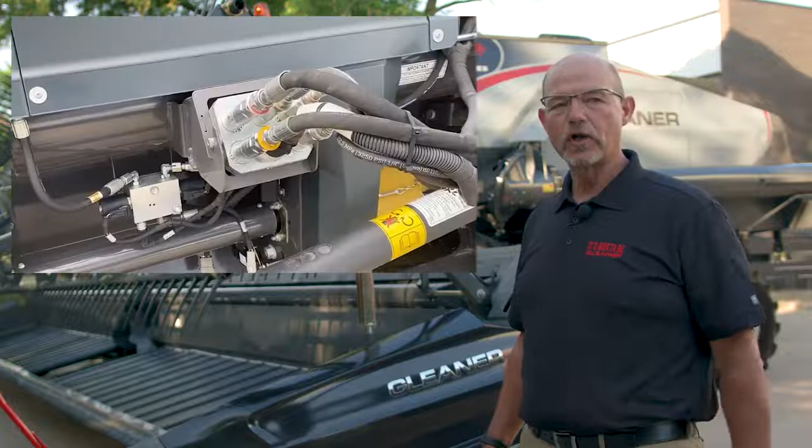So let's start with the 9300 header, which is designed to provide a smooth, even crop flow into your Gleaner combine. The 9300 Dynaflex header is available in widths from 25 feet all the way up to 40 feet. The structure is designed with upper and lower tubes, which gives us increased durability. It has a single point hookup for easy attachment and detachment of the header from the combine.

The dividers on the header have a narrow profile which reduces the footprint and helps keep the header from plowing or pushing into the field. The lightweight design of the dividers and end shields decreases the weight on the skids to also help prevent plowing. There are optional stainless steel skids available as well as a low skid option.

To assist with guiding the crop into the header and prevent knocking the standing crop down, we also have available longer divider rods. We have several different divider rod options for different field conditions. The header is standard with a fixed pitch for your Gleaner combine, but it is also available with a hydraulic pitch, which allows you to adjust the cutter bar angle as needed for different field conditions.

Now let's take it over to David, and he's going to talk more about the cutter bar. The cutter bar gets its flexibility from the hydraulically dampened tilt arms. These tilt arms are located every 30 inches across the length of the header, giving us a flexibility range of 8 inches, and the ability to cut close to the ground even in rolling ground conditions.

The flotation is assisted by a hydraulic accumulator on each side to provide constant ground pressure while flexing. The pressure is adjustable from the cab, allowing you to set the ground pressure for varying field conditions, or to pressurize it completely for a rigid cutter bar.

Underneath the cutter bar, we see the UHMW covered skids that slide smoothly across the ground. On each end of the header, we have optional stainless steel skids that give us better wear life compared to the plastic skids. For the sickle, we have two options available.

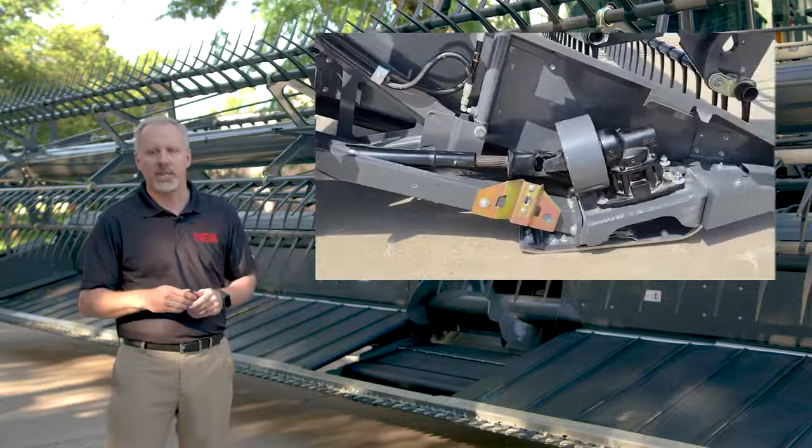On this header, we have the Schumacher cutting system, or you can choose the AGCO cutting system. All sizes of the Dynaflex headers have dual sickle drives driven from each end of the header with a dampened PTO shaft and a heavy-duty flywheel, which reduces vibration and increases longevity on the sickle and the structure. The independent tilt arms, the skids, and the sickle together will give you superior ground following and cutoff performance for all of your harvest conditions.

Mark, let's talk about some of the features on the drapers and the center feeding.

Thanks, David. In order to get the crop into the combine, the drapers provide a simplistic design that requires less maintenance and promotes less downtime. The side draper canvases are 41 inches wide and move at 502 feet per minute in order to keep the crop away from the cutter bar and flowing into the combine.

Coming soon, we will have an optional variable speed draper drive to allow adjustment of the draper speed to optimize crop flow into the center draper and ultimately into the combine.

To provide consistent tracking and alignment, a V-guide is designed into the header. There's a stainless steel belt guard on the front providing long wear life and a smooth transition from the cutter bar to the drapers. The inner belt roller has a scraper installed to prevent material buildup.

The tension for the belt is obtained through a spring-loaded tension system, with an extended adjustment range as well as an indicator to show the tightness of the belt and match the tension of both the right side and left side belts. There's an onboard tensioning tool when adjustment is needed. As a starting point, we should adjust the tension at the midpoint of the indicator. The center draper is 48.5 inches wide with a canvas that moves at 573 feet per minute.

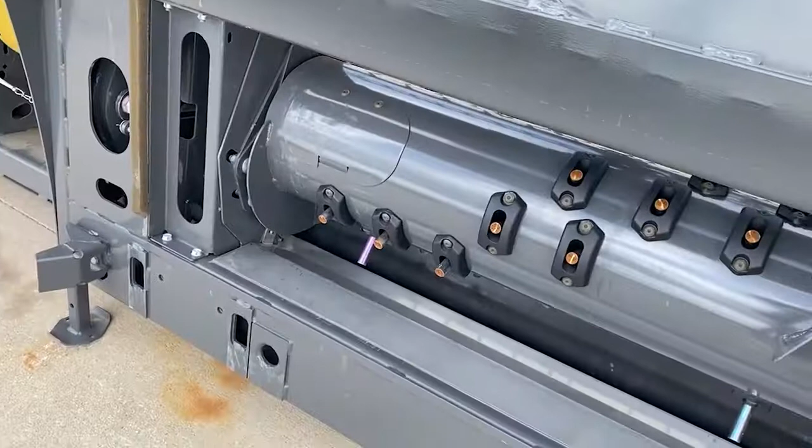Also available is an optional retractable finger feed drum with adjustable finger timing. This is recommended for high yield crops such as canola and other crops where you may have material other than grain.

There is a stainless steel auger pan which increases the life of the pan in this high crop flow area. Clutch protection is incorporated into the drive system for the center draper.

Should an obstruction occur, it will protect it from any damage. Now let's go back to David and talk more about the reel.

The reel on the Dynaflex is a robust design with a large center tube and heavy-duty tine tubes. The plastic tines are designed to hold up in tough conditions.

The tine pitch can be adjusted from the right end of the header of the reel, which makes the reel more or less aggressive. The reel is hydraulically driven, allowing the speed to be adjusted from the cab to optimize crop flow.

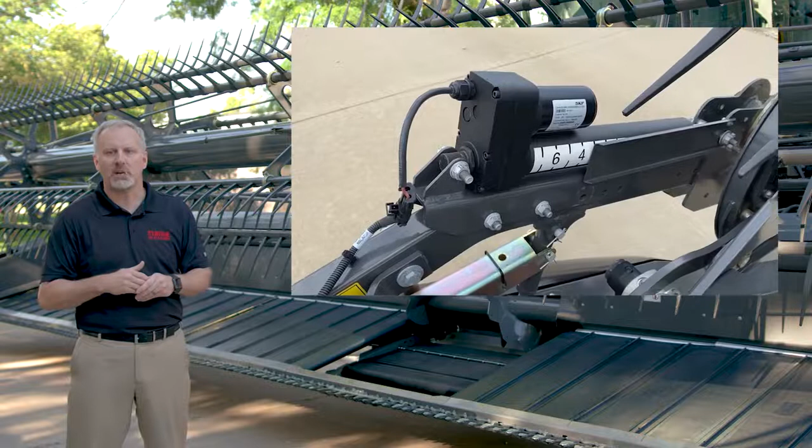The fore-aft position of the reel is controlled with electric actuators, which can be adjusted from the cab, again to optimize crop flow or move forward to pick up down crop.

We've already talked about some of the options available, but there are a few more we should cover. First, you have the option to add optional stabilizer wheels for the 35 and 40-foot models. Stabilizer wheels will dramatically improve the header height performance in both rigid and flex mode.

The stabilizer wheels are a torsion axle design with no springs or shocks to wear out. They're adjustable with two field positions: an upper position when cutting on the ground, and a lower position when cutting off the ground.

In addition to the field positions, there are two transport positions: one for transporting with the tires installed, and a second one with the arm folded up close to the back of the header and the tire removed to reduce transport and storage width.

Another option is the transport kit. The foldable design connects directly to the bottom of the frame. It folds out of the way when harvesting, then folds down quickly into the transport and storage position. We recently replaced the tires with high flotation tires and have made several durability improvements to the frame.

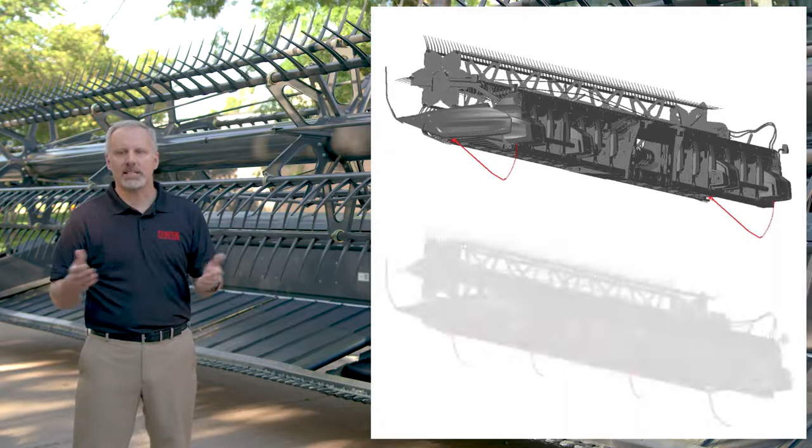The header comes standard with cutter bar sensors for flex mode. In rigid mode, you can choose between two drag rod options. Our base drag rod has two steel drag rods, one located on each end of the header. The Headsight option comes with 4 drag rods mounted directly below the cutter bar for better ground following performance.

Available this year is an optional top auger, which will improve feeding in canola or any high volume crop such as oats or barley. For harvesting canola, you can choose between 2 end dividers: a wing style divider, or electrically powered side knives. We also have an optional sealing package to seal around the center deck to prevent crop loss under the drapers.

Mark, let's talk about how we hold up against our competition.

During the 2020 soybean harvest, we did some benchmark testing of the Dynaflex 9340 against a MacDon FD140. The test was performed in Illinois. Both headers were powered by identical combines, and both headers were run in the same field on the same day, side by side. In order to calculate the header loss of both headers, the loss sample was taken directly behind the header before any combine losses could be spread over the test area.

At varying speed, it was found the Dynaflex averaged 0.3 bushel per acre loss, while the MacDon averaged 0.56 bushel per acre loss. If you associate this loss into dollars, that would equate to about $3.75 per acre more than the 9340 Dynaflex. In this test, the Dynaflex can provide up to 65% less harvest loss, while providing an average of 47% savings per acre on grain loss.

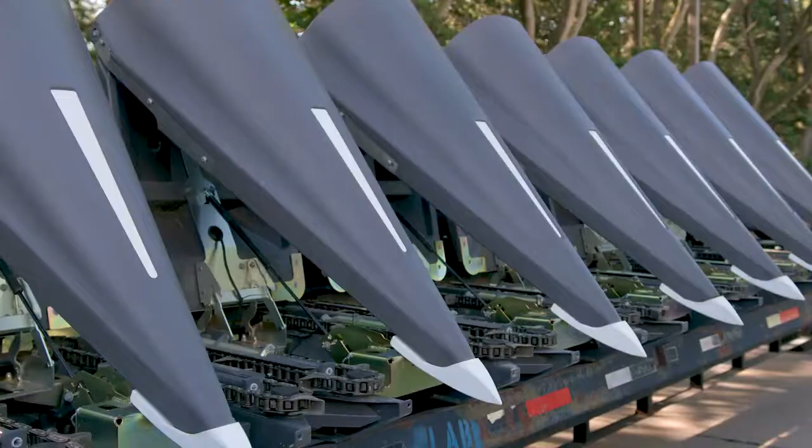Now we're going to take some time and review the 3300 series corn head. The corn head is available in 30-inch spacings and 8 and 12-row configurations for your Gleaner combine.

Just like the draper head, the corn head has a single-point multi-coupler hookup for the hydraulic and electrical connections. The auger is 20 inches in diameter, and the 30-inch pitch of the flighting helps convey that material to the combine. The conveyor hood is standard equipment and helps control crop flow into the feeder house as well.

In order to get the crop to the row units, the snouts on the 3300 corn head have a low profile design with an adjustable entry angle to help pick up down and tangled corn.

The head has hydraulically controlled fore and aft pitch adjustment of 12 degrees, giving you the optimal angle needed for picking up the crop. The pitch is adjustable from the cab and includes an accumulator to help absorb shock loads.

The snouts themselves are polyethylene and cove-shaped to promote crop flow into the row units and also help keep the cobs controlled in down and tangled corn. The back of the snout is designed to help prevent cob loss, and there are optional ear deflectors available. The snouts have optional skids at the point which also help keep those snouts from digging into the ground.

Now David's going to walk us through the row units themselves. The heart and soul of the corn header is the row units.

The row units on the corn header are driven with a self-contained gearbox. The snapping rolls are designed with replaceable knives in a point-to-point configuration. This design aggressively pulls the stalk through the deck plate to strip the ears from the stalk.

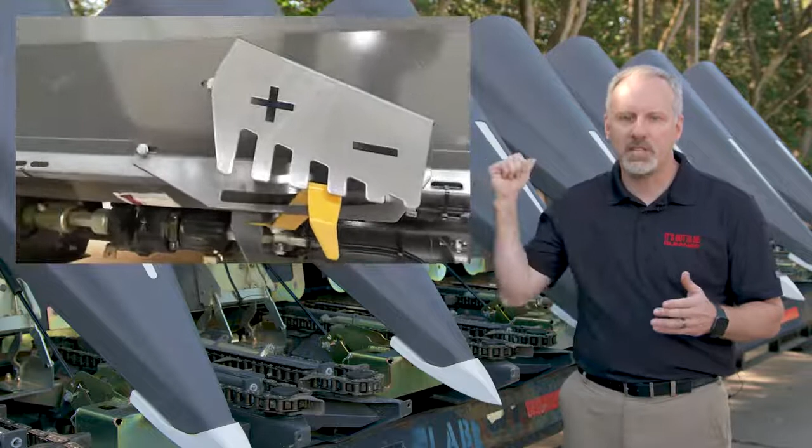For 2021, we redesigned the entry section of the deck plate and the front idler support to reduce the gap between the gathering chains and the deck plate. This reduces row plugging. The deck plate gap is electronically adjustable from the cab, and the position can be easily seen with an indicator on the back of the header.

Before we leave the row units, let's talk about the optional stalk chopper. The chopper is a two-blade design which promotes a better quality of cut. The blades are reversible with a laser-clad hard surfacing which continues to maintain a sharp edge as the blades wear.

The chopper is located behind the stalk rolls to eliminate ear loss. This allows the stalk to be pulled through the deck plate before chopping it. The choppers are individually driven, so each row unit can be disengaged with an individual lever. These design features and the integrated chopper result in lower power requirements to run the header.

One other option to mention is the stalk stompers. They are available for both chopping and non-chopping corn headers, and the mount is integrated directly behind the row unit. The stompers will help break down the stalks and improve residue management, and this helps prevent tire damage.

One last topic to discuss is the technology components available on the corn header. The Command corn header is pre-wired for both Reichhardt row guidance and Headsight header height drag rods. Both sensors are available from AGCO for field installation.

Mark, why don't you wrap us up? So now we've gone through the highlights of the 3300 series Command corn head. I feel you can see how this corn head can accentuate your Gleaner combine and provide you with efficiency and worry-free operation while picking corn.

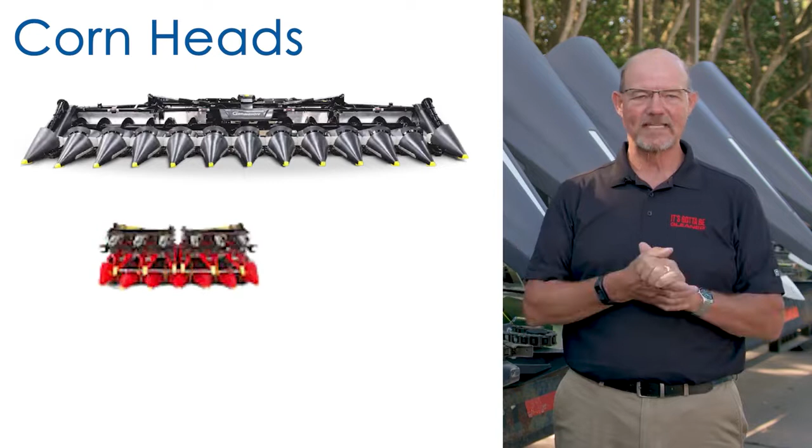The corn head is available in 6, 8, and 12 row, available as well in rigid or folding configurations. All of the corn heads are 30-inch configurations and will also offer narrower spacing configurations. The row units include a stalk chopper as well as an optional reel if needed.

Together, AGCO and Gleaner offer the largest header offerings in the industry, allowing our customers more choices with greater flexibility for their operations. Thanks for joining us today and learning more about our header offerings for your Gleaner combine. Back to you, Kevin.

Great, guys. Good reminder for everyone on some of the great features of our headers. Also, it's pretty impressive to see how the Dynaflex outperforms the competition.

All right, next on our agenda is Scott Small, AGCO Account Manager, and he's going to take us through a section on the AGCO Support Network and a more in-depth look at Gleaner Care. As we all know, things do happen during harvest, and we want you to be as prepared as possible with the tools we offer to protect your investment. Remember, if you have any questions, go ahead and enter them in the chat, and we'll get you the answers. Okay, Scott.

Thank you, Kevin. Good afternoon. My name is Scott Small, Account Manager in the Oklahoma and Texas region. Thank you for taking the time today to learn more about Gleaner combines and how the Gleaner can help your operation reach its full potential. Today, I want to briefly cover a couple of programs available through your Gleaner dealer, which will help maximize uptime and protect your combine investment.

The first program is Gleaner Care, the best combine coverage available on the market today. Gleaner Care includes the following to maximize uptime during your critical harvest window: a 3-year, 1,250-hour warranty through AGCO Protection. This is the most comprehensive extended warranty in the ag industry available today. One of the major points that sets this warranty apart from others is service call travel mileage coverage that starts on day 1. This protects you from unexpected costs during harvest should a breakdown occur. This extended warranty is exclusively available through your Gleaner dealer.